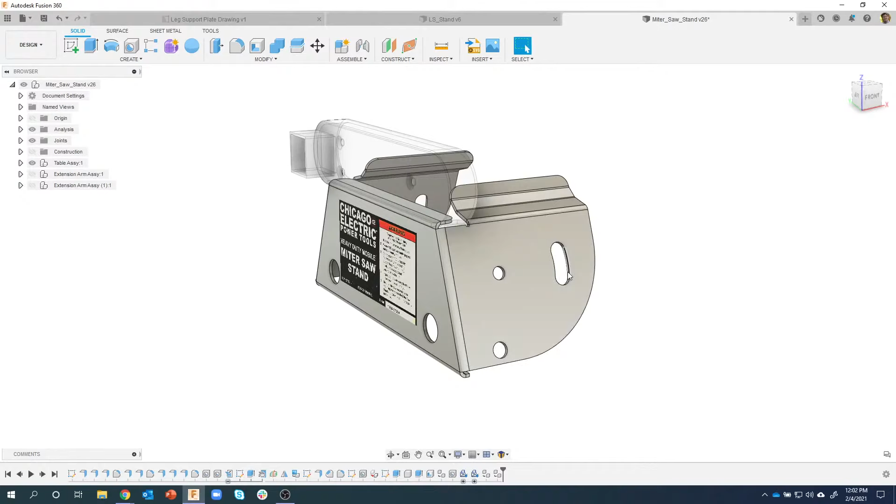We're going to continue on with the miter saw project. We're going to be focusing on this sheet metal part today. We're not going to do this little slot right here. We're going to do that at a later point with some cool tips and tricks.

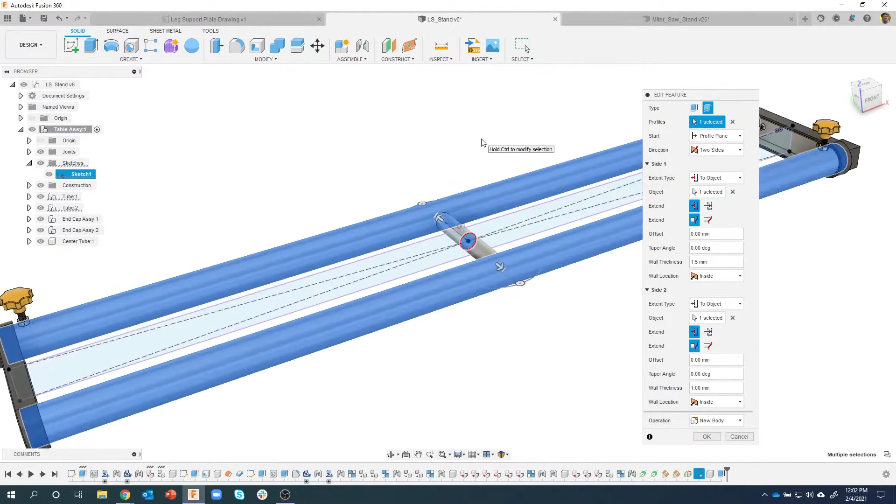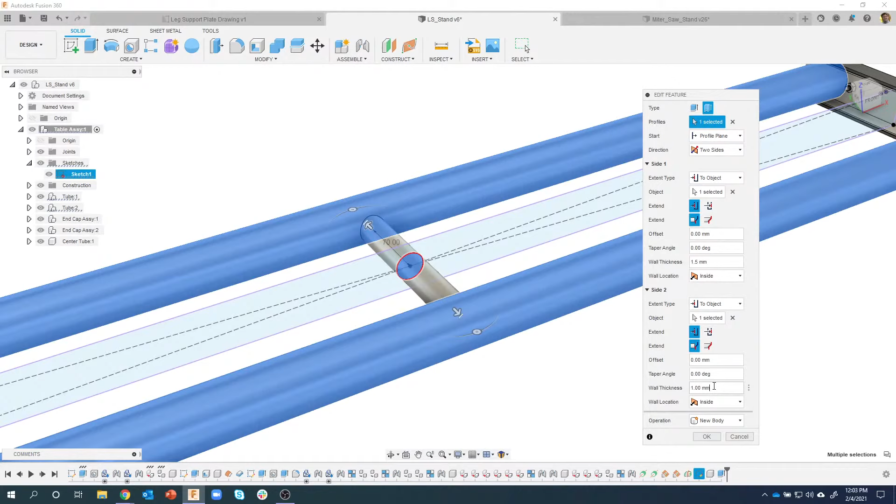I'm actually going to start out with something that you guys noticed on my last live stream when we created this center tube. I'm going to go ahead and edit that feature. If you remember correctly, I did a two-sided thin extrude, and because I was rushing, I made a mistake, and hopefully you guys can see this. A couple of you pointed this out. I typed in the wall thickness of 1.5, but notice down here on side 2, it defaulted to 1 millimeter, and so there's actually different thicknesses going in one direction and a different thickness going in the other direction.

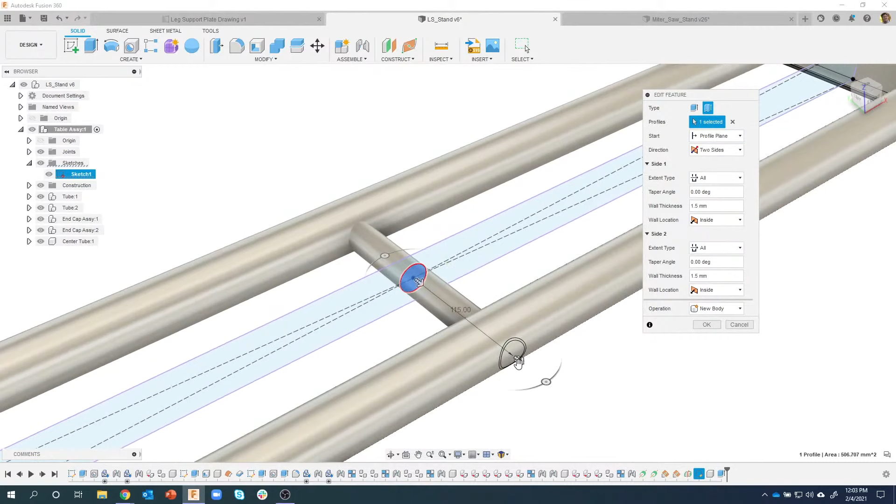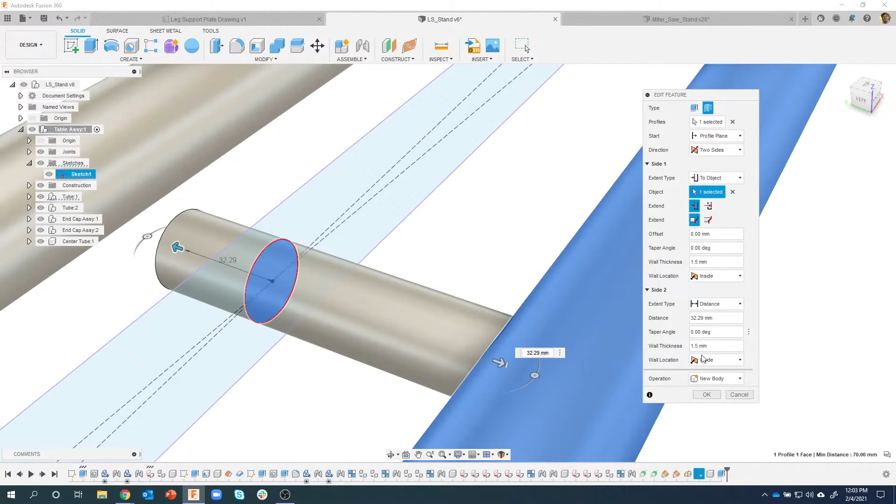And some of you asked, how come you just didn't do a symmetric extrude? And the reason for that is, you'll notice when I switch to symmetric, that it says distance or all. And if I go all, it goes all the way through. So there isn't a to object in symmetric. So that's why I ended up doing the two sides. So this allows me to specify different distances for either direction. And here I can say to object. So for example, click here and it's only going to extrude to that object, but I just need to make sure with the thin extrude that I type in my correct wall thickness. So good catch for those of you that noticed that.

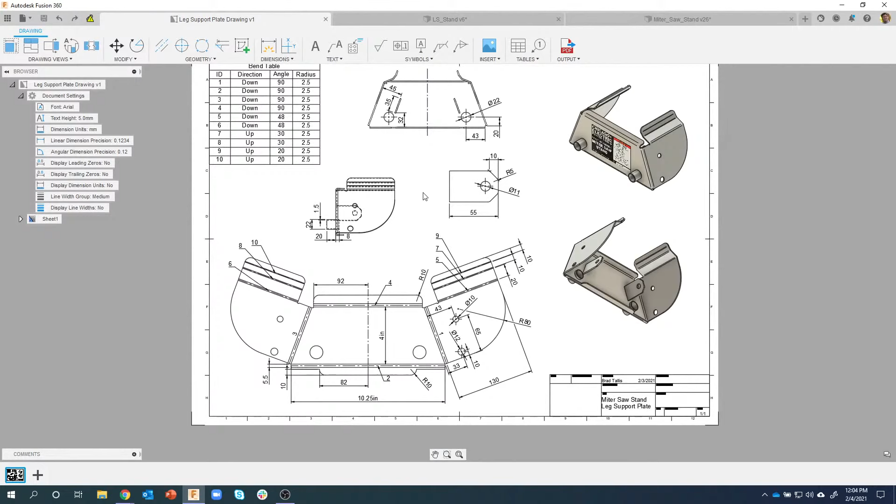We are going to be creating this part here. It's a sheet metal part. I'm going to basically walk through step by step. I've included the drawing, and you'll notice the drawing is going to look a little complicated. Yeah, there it is. But this is a typical sheet metal drawing. Here's the flat layout. And then you'll notice these numbers like 4, 5, 7, 9, etc. These are bend identifiers. And you can see I have a bend table in the upper left corner. So it tells you which bend.

So let's just pick on bend number 5, for example. Bends down at an angle of 48 degrees with the default radius of 2.5. And this will make more sense as we go through. You'll also notice that there's some sheet metal tabs in here that get welded on. Basically what we're going to do here is make it so we can put some legs. This is basically what supports the legs for the whole assembly.

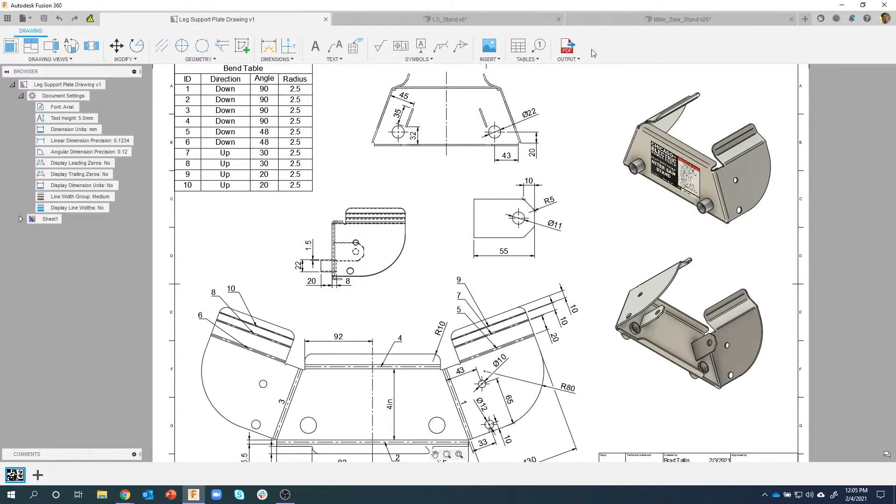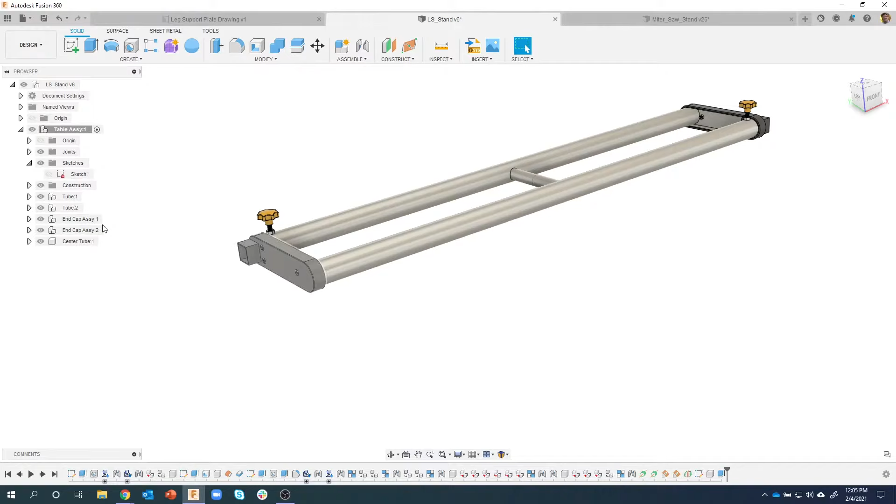Okay, so let's continue from where we left off last week, which was we created these end caps, the tubes, the center tube, etc. And so now I want to start creating the ability to have the legs on here. So let's activate the end cap assembly. Okay. I need to make a change that I forgot to do on the last live stream. So I need to modify this black plastic part. So I'm going to go ahead and activate this assembly. And then let's just do the end cap cover. That's all I'm really concerned about right now.

What I want to do is basically remove, in fact, let me get rid of the end cap. Let me just turn off these tubes here so you can kind of see. I want to remove this whole section right here because the sheet metal part is going to be inside of here. So here's a neat little trick. So I'm in my end cap cover. So these are all the features that have to do with my end cap cover. And I'm just going to come in here and say extrude.

And if I go in the negative direction, you can see that it's going to cut that geometry away. Okay, so I'm going to specify to object, and I'll just pick this top face. It's going to say cut. We'll say OK. And now you'll see we have this end cap, this metal part, and then this plastic part kind of fits over that a little bit.

Okay, I'm going to go to my higher level assembly, which in this case is my table assembly. Activate that, and I'm going to create a new sheet metal component. So to do that, I'm going to come over here to my sheet metal tab. So it's kind of across the top, and you'll see create new component.